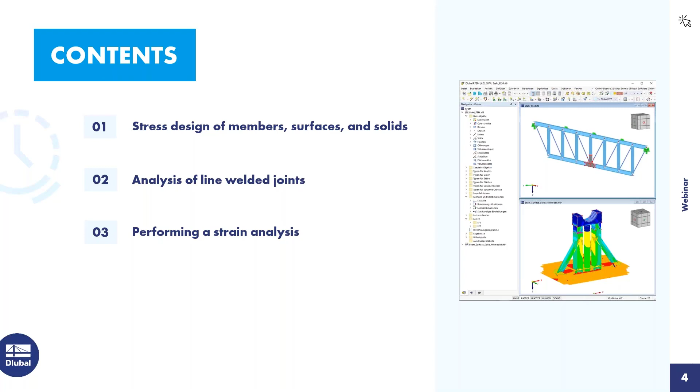I will do this as a live demonstration, so I didn't prepare any additional PowerPoint slides, I will jump directly into the program. Today I also would like to work with predefined files in order to keep the focus on the essential topics.

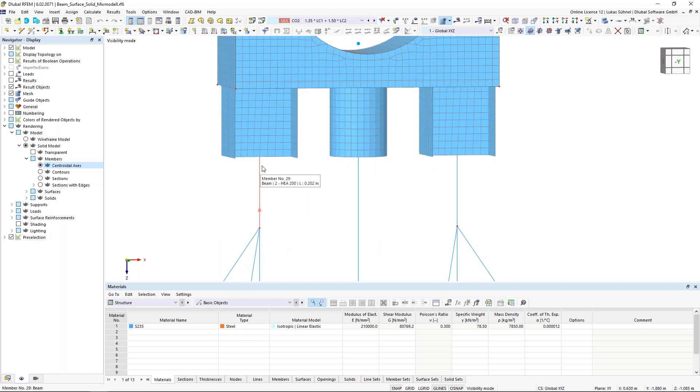What do I have here? I have a mixed structure, mixed in the sense that I have a member structure, surface elements, and also solids. Let me quickly change the rendering so you can easily see the differences. On the bottom, we have this member structure. Then I converted a certain part of my members into a surface structure, as you can see here. It's just the continuation of my members if I display them again. And on top of that, I have my solid model on which I will place some loads.

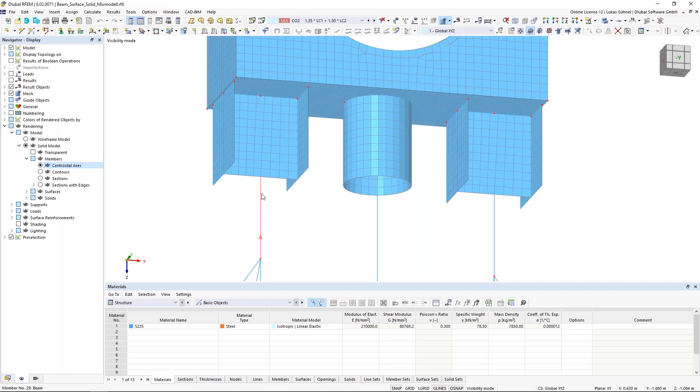Regarding the modeling, which is maybe also interesting to know, in general we can model members, surfaces, and solids in one structure, which is already quite nice. And if you think about the load transfer and the correct transfer of the stiffness, you have to take care of some things when you have a 1D element and 2D elements.

By simply converting these members into surfaces, as I did here, often you don't have a properly or correctly defined connection. You can see it on the left. The surfaces in that area are now basically supported on only one FE node, the FE node where this member connects to the web of this beam. That is, of course, not correct. You would definitely get singularities in that area, and the stiffness transfer is also not correct.

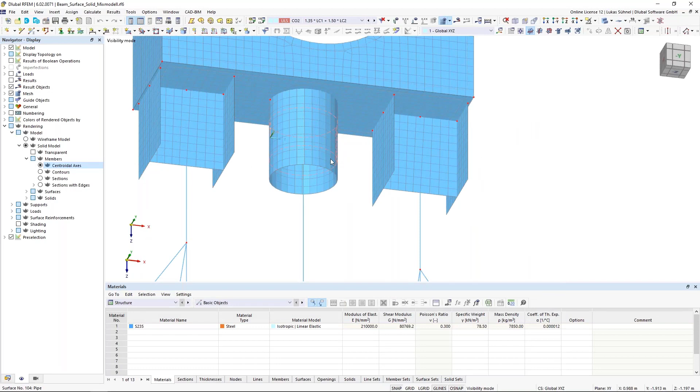Another example can be found in the center. We have here a pipe section, and when you convert a pipe section into a surface, you get the pipe surface. In such a case, you have no connection at all. You can imagine the member is in the center of that circle, and the surface is of course not connected to that member at all. So here we also have to do some modifications in the modeling to have it properly connected.

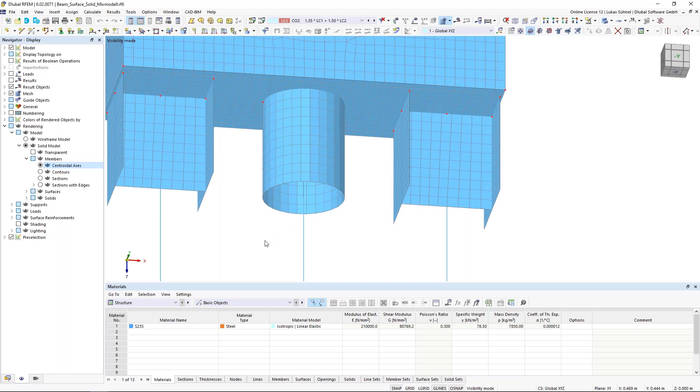And I have it here, I just didn't show it so far. So I will cancel my visibility mode, and the connection can be done in, let's say, 2 ways.

I can use so-called rigid surfaces, and this simply will transfer all my forces and my deformations that I have in this beam, or also vice versa in that surface, via a stiff surface onto the other side. In the center, it's even more crucial, because with this stiff or rigid surface, I'm connecting my member with my surface. Before, I had no connection at all. And again, all deformations and internal forces will be transferred from the beam to the surfaces equally.

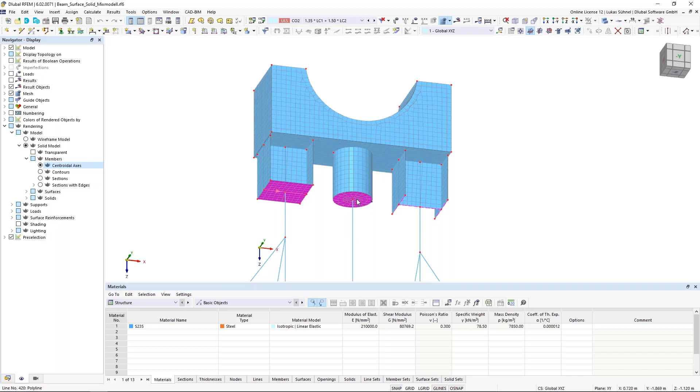An alternative modeling is visible here on the right-hand side. Instead of using a rigid surface, I simply assigned rigid members onto the boundary lines of my surface model. A member with member type rigid works similar to my rigid surface. So this is how you can connect a 1D element with a 2D element. The rigid surface or rigid member may help you here.

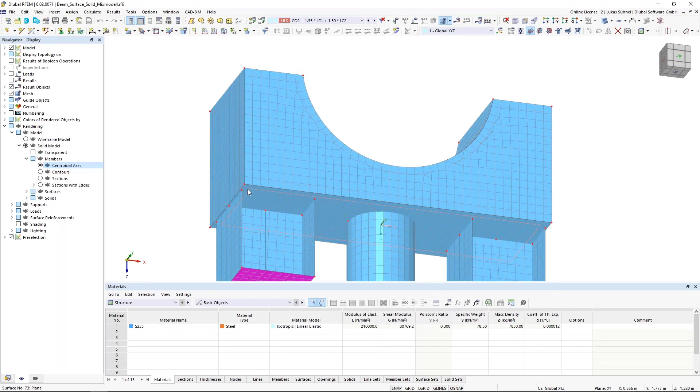Regarding the connection of a surface model with a solid, this is quite easy. The surfaces are defined by the boundary lines - these are those lines here, which are placed inside the boundary surface of that solid. We have a so-called automatic object detection in those surfaces, so the surface detects that there are lines placed inside it, and if that's the case, the FE mesh generator will automatically consider those lines when the mesh is generated. So we have a fixed connection between those lines or surfaces and the solid.

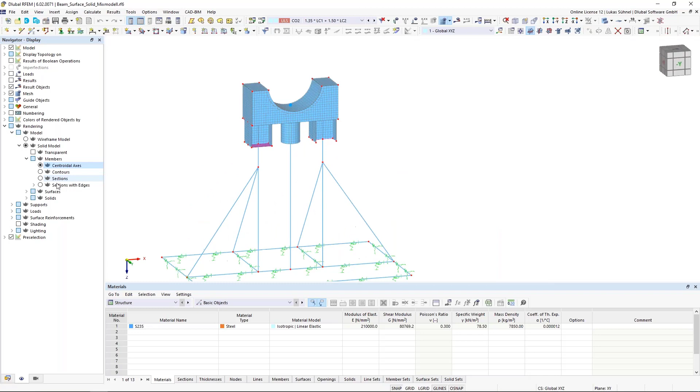So far regarding the modeling. Regarding the loading, these are German names, never mind.

I have 2 load cases: my dead load case here, and then some load in my live load case. That's all I want here in this example. And of course, we have the combination of those load cases using an ultimate limit state design situation and a serviceability limit state design situation.

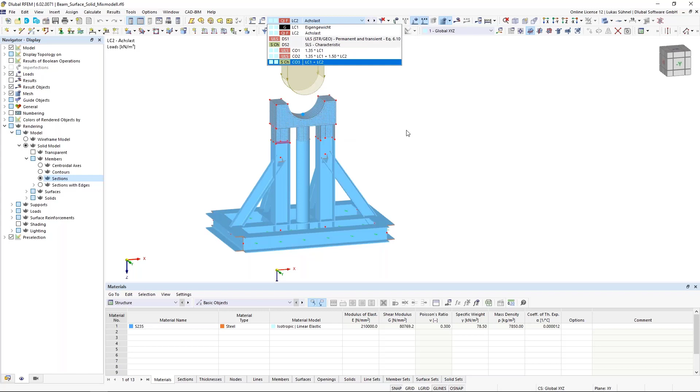Now, if we want to design such a structure, we have 2 main designs that we have to run. We have to run a stress analysis or a cross-section check for our objects, and we have to run a stability design.

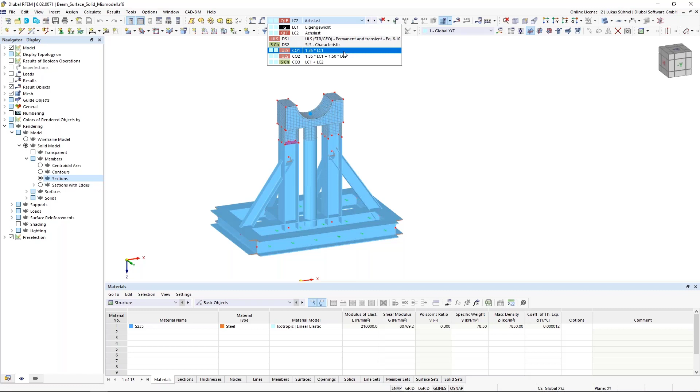Regarding the stability design, I would like to take a look at the results first. So that's what I will do now. I will calculate the important load combination - I have just one here that actually matters, the combination of the dead load and the live load. And let's have a look at the results.

Maybe just on the members for now. I can display the external forces in here, maybe in a different view like that. All right, and what I can see here is I have, of course, compression in my columns, or in my members. So compression is, of course, a sign for buckling.

So if I have compression in members, I have to check buckling. What else do I have? I have some shear forces inside, but they are really small, so shear buckling is most likely not an issue. I have really small torsional moments, I can neglect them. And my bending moments, MY and MZ, are also quite small compared to my cross section or to the dimensions of these beams, so I would say also the bending moments can be neglected.

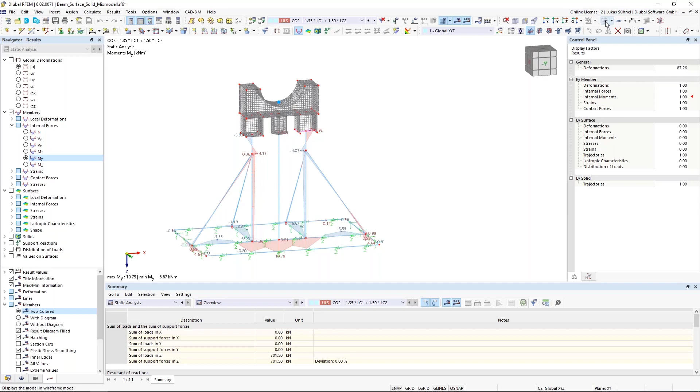What does it mean if I neglect the bending moments? Then lateral torsional buckling is most likely not an issue. And if I check again my structure, I have all these diagonals here connecting to my columns, a pipe section, where lateral torsional buckling is not important at all. So I think it's fair to say lateral torsional buckling is not an issue here.

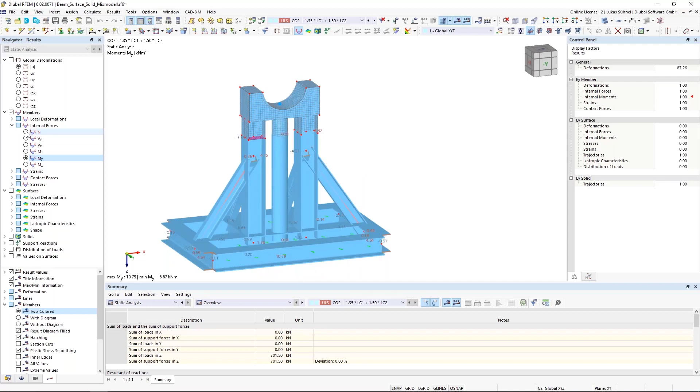What could be an issue is, of course, buckling. But for buckling, I can use some limit checks, or let's say some specific checks, to judge if buckling is actually an issue. And such a check can be found inside the Eurocode 3, in chapter 6.3.1.2, in brackets 4.

The formula basically is you take the axial force in a member and divide it by the critical force of a member. If that is smaller than 0.04, then you don't have to run a buckling check for a member. If we switch it around, and say the critical force of a member divided by the existing force is bigger than 25, then buckling is not an issue. And this is a value we can check via a specific add-on.

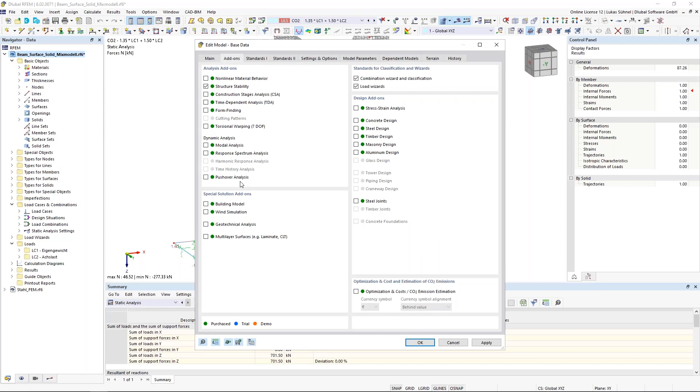I want to do it quickly before I start the stress strain analysis. So if I go into my add-ons, I can activate the structure stability add-on. Now this will calculate this critical load factor, which is the same as I just said, the NCR, the critical force divided by the actual force.

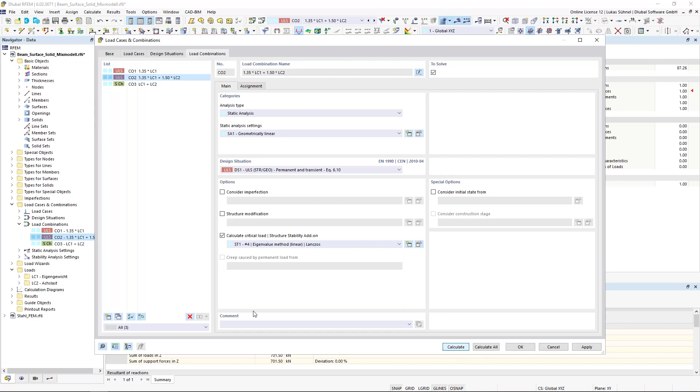I will calculate it in this specific load combination. I can activate now the calculation of the critical load, and I will start the calculation. So this add-on will calculate this critical load factor. It will also calculate buckling lengths and buckling length factors. For me, important is now only the critical load factor, and again, if that is bigger than 25, then buckling is not an issue.

Just a few seconds more. All right, there we are.

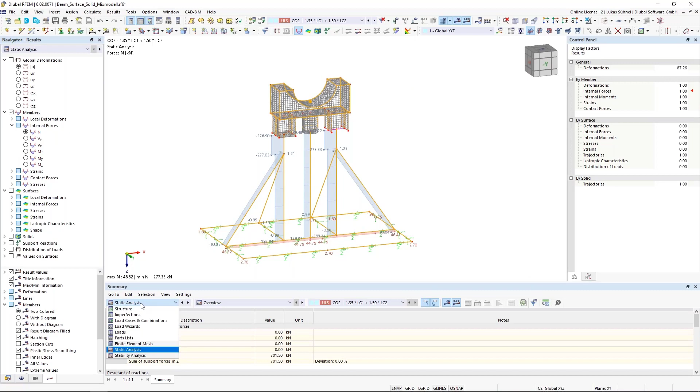So how can I display these results? Well, I can switch in my tables to this stability analysis add-on. And the first value that will be shown here is already the one that I'm interested in. The critical load factor is 29, which is bigger than 25, so I'm good.

And if I want to analyze it even further, I would have to look for an eigenmode that actually deals with the buckling. This could be, for example, the fourth eigenvalue eigenmode. And here we see this would be some kind of buckling for my columns. I have here the factor 34.5, so much bigger than 25. So I can easily say buckling is not an issue.

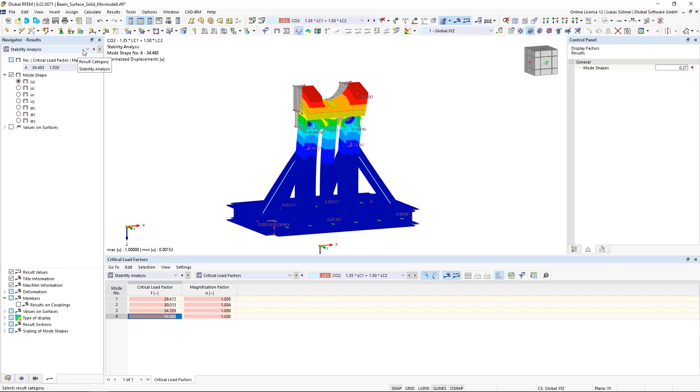Now I excluded buckling and lateral torsional buckling. That means it is enough to simply run a stress analysis for the structure. I can do it in two ways. First of all, I would like to check what result RFEM, the basic RFEM, gives me. So I go back into my static analysis results without using any add-on.

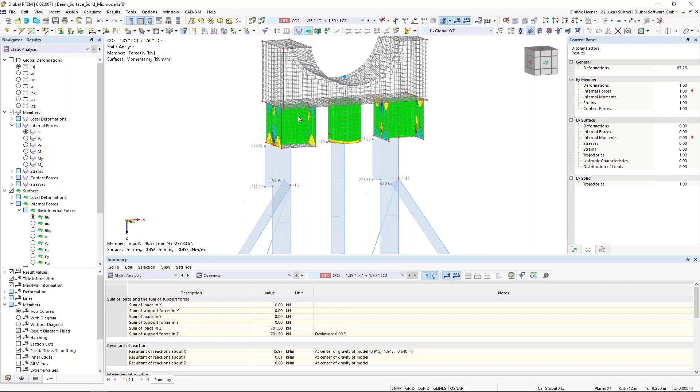And I can see that RFEM calculates the deformations, of course. It calculates the internal forces in members, the internal forces in surfaces and so on. But it also gives me the stresses in members, for example, the equivalent stress according to Mises. It also gives me the stress inside surfaces, and of course, also in my solids.

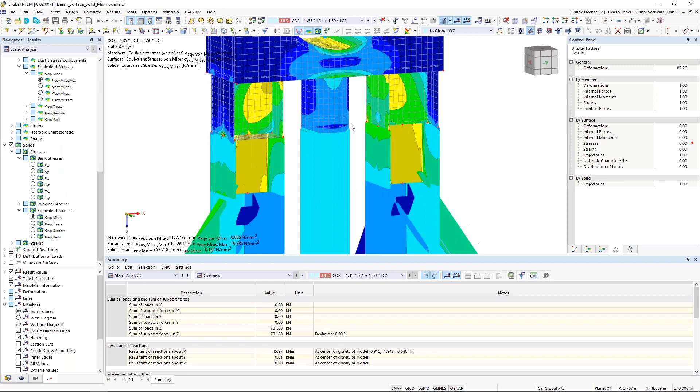So now I'm displaying the stress on all elements. You could use the information in this panel on the right-hand side, or this max-min information on the bottom left of this graphic window, to see that the maximum stress for members, surfaces, and solids is below the yield stress from my steel S235, 235 Newton per square millimeter. We are actually below the limit, so the stress check is fine.

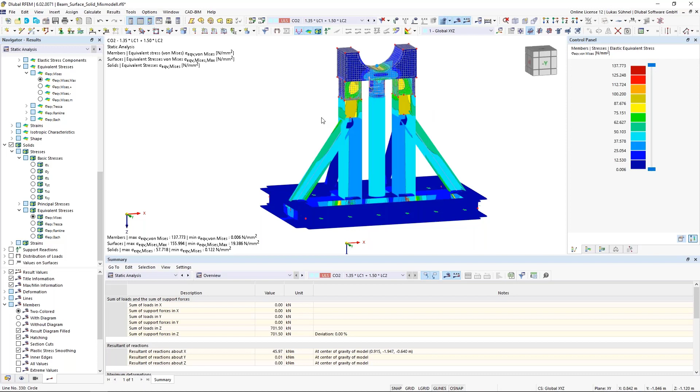Now, if you prefer a design ratio, not just a graphic which shows that stresses are smaller than 235, then you could use the stress strain analysis add-on for that. So let's check this out as well.

I will activate the add-on in my add-ons tab, as I did before with the structure stability. The stress strain analysis add-on can be found on the right-hand side under the design add-ons. Usually we have to deal with the standards—if we run a steel design or a concrete design, then the standard is important. The stress strain analysis add-on is standard independent, so we don't care in that case.

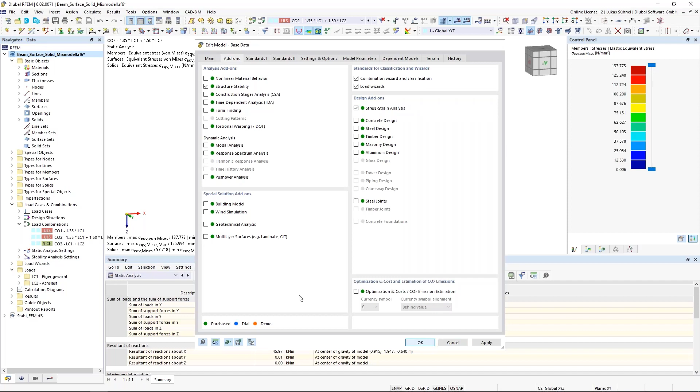Now, when you activate an add-on, you get a new entry in the tables, and this is how I personally usually deal with the add-ons. I go into my table on the bottom and click through these subtables. Let's do it for this example, just using a different display. I'm here in the input data, in the first subtable, design situations, and here I can decide which design situation should be analyzed. Of course, it makes only sense to analyze the ultimate limit state and not the serviceability limit state design situation, so I deactivate the second one.

In the next table, you can select which objects you want to analyze. Here, all objects are selected. Of course, you could select the surfaces or the members that you want to analyze if it's not all of them. In my case, I will simply analyze all.

There's another table which looks quite similar, but this is called objects to analyze stress ranges. So if you want to run a fatigue design afterwards, you need the stress range - the difference between the maximum and the minimum stress at a certain location. You can also select those objects where you need the stress range for. In my case, let's say I need the stress range in my solids, so I'm selecting the solids.

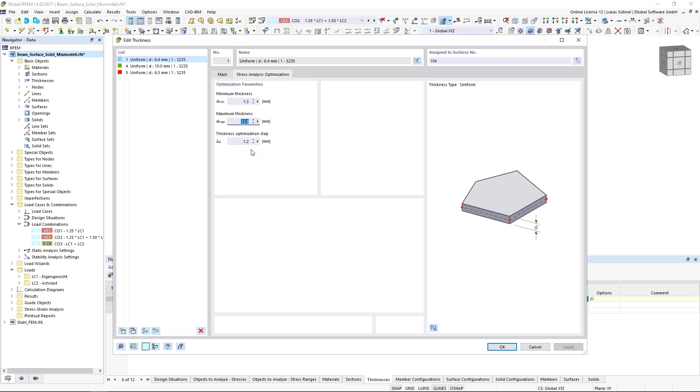So let's say you have a specific surface and you are not sure which thickness is appropriate. You can right click and activate here also the optimize functionality. Then you get an additional window, and here you can define the minimum thickness, maximum thickness, and the step. Then it will look for the best thickness. I will not use this now, just as an information.

Now we have 3 additional subtables here, configurations. In those configurations, you can define which stress do you want to analyze. You could, of course, select all of them, but usually that's not what you care of. Usually you care only of, let's say, maybe the equivalent stress according to Mises, maybe the total shear stress, maybe the total normal stress. This is maybe what you're interested in.

So with the click in this table, you select which stresses you want to calculate, and with the center column, you can also define the limit stress. You can see here the limit normal stress, limit shear stress, and limit equivalent stress is selected.

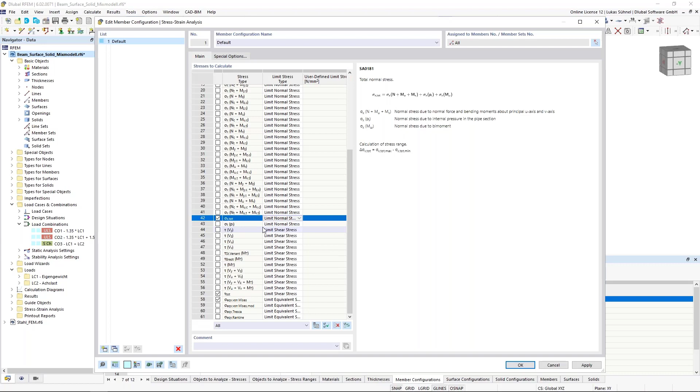So we try to do it automatically for certain materials. For some materials we can't. In that case, you can select here user defined, and then you can enter a value in the last column. In my case, I'm using the limit normal stress.

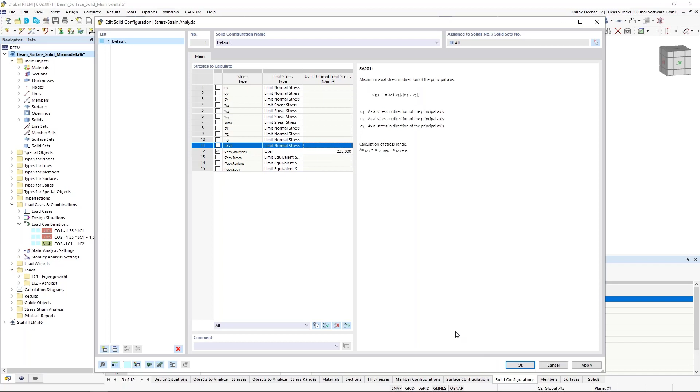For the surfaces, the same configuration basically - let's select only those two. And also for the solids, we have a configuration. Again, I'm only interested here in the equivalent stress according to Mises. And just to show it, we can enter here a manual value, maybe 235 Newton per square millimeter for my material, which is an S235. So that makes sense.

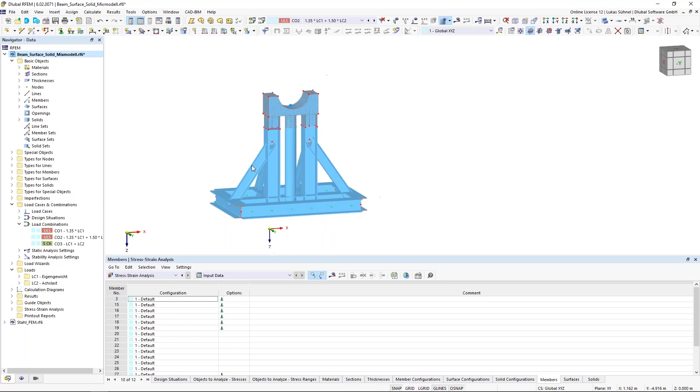In the last tables, you can assign the different configurations that you may have to your members, but you can also do it graphically. So let's say you have multiple configurations for your members, you can edit the members and simply assign the configuration in that window to them. So the handling, I'd say, is quite easy. We already finished with the input, so we can run the analysis.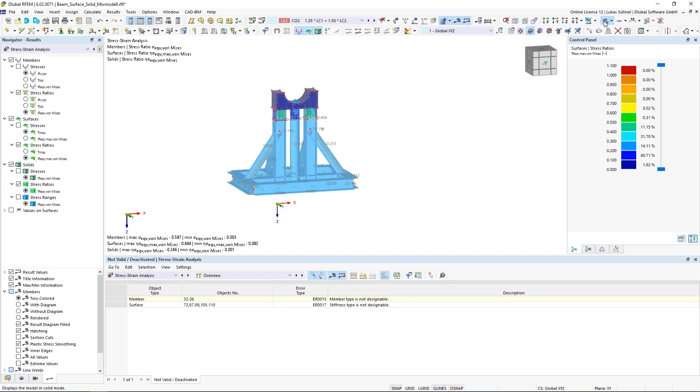So after the analysis, we get results graphically and also in the tables. Let's start with the tables first.

If there are design checks which are not fulfilled, or you have selected objects that can't be designed, then you get an overview table. If everything is okay, you won't see this overview table.

Just in case something is not correct or you get a warning, it will show up as shown here. We can see that for some members and some stiffnesses or surfaces, basically, the design is not possible. That's nothing which should bother us.

At the beginning, we said please design or analyze all members. All members also included the rigid members. That makes no sense, basically. We have no section for them. We have no material assigned to them.

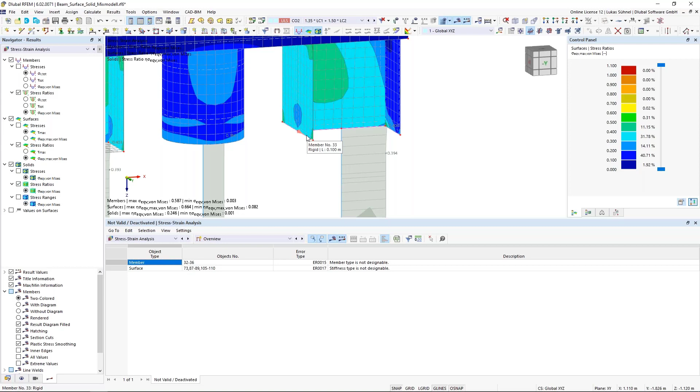We can't analyze them in this add-on. That's what this add-on just tells us here. They are not designable. And the same, of course, for the rigid surfaces. So nothing we have to worry about in that case.

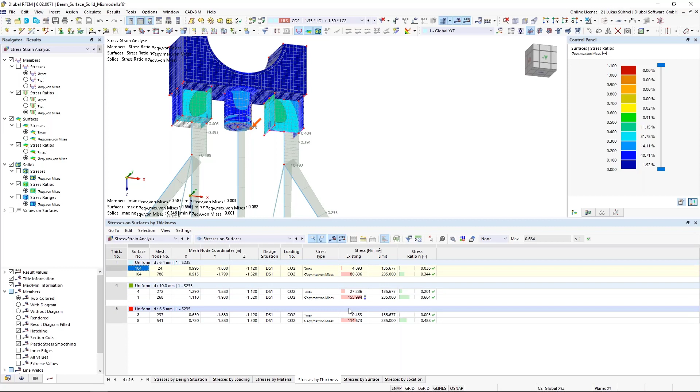If you want to see the details of the results, we can go into the stresses on members tables, or stresses on surfaces and stresses on solids. This is the stress or table output, with different filters by design situation, or for each surface the maximum stress, or for the various thicknesses that we have assigned here.

We can also display these results graphically. On the left, you can see we have here an updated result navigator for the stress strain analysis results, where we can select the stresses in our members, on the surfaces, and so on. I think this is quite clear how to handle that.

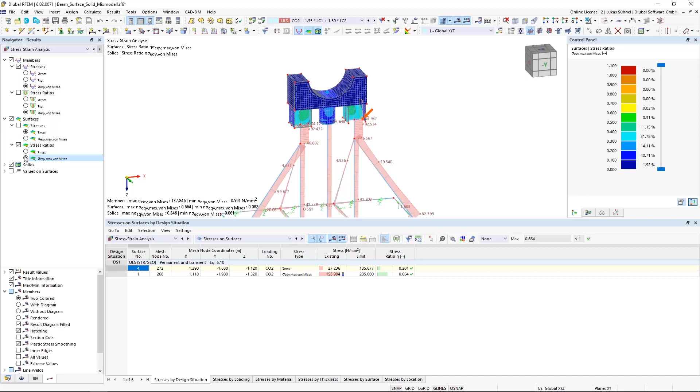The last information here: we also selected the solids for a stress range analysis. Again, those results can be found in the tables. This table looks a bit different, as you can see. You can see the minimum stress, the maximum stress, the range, basically the difference. And you can also see which combination or combinations are linked to this stress range.

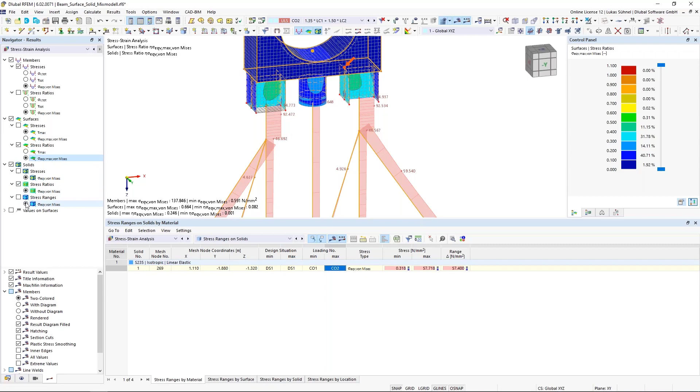All right, again we could display this graphically. So far regarding this basic functionality, the stress analysis on members, surfaces, and solids.

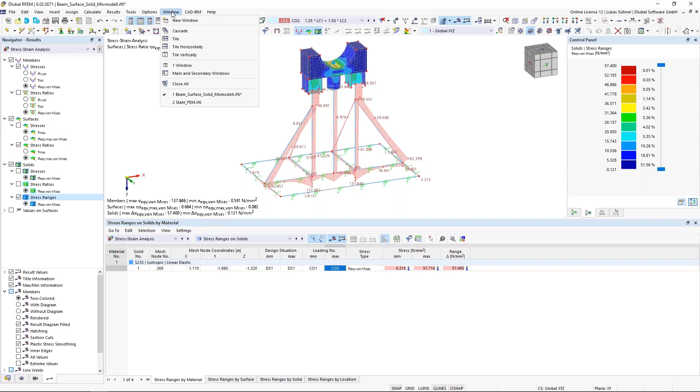And now I would like to switch to my second chapter, where I would like to show you the stress analysis of a line welded joint. For that, I have a different structure. Let me quickly explain it.

It's a 2D truss member. Basically, the tension forces will be taken over by these round bars, the compression by these HEA sections. And one particular detail joint I wanted to analyze using surfaces, basically.

You can see the rest of the structure is again a beam structure, a 1D element structure, and this specific detail I want to analyze in detail using surfaces.

I modeled the connection plates here. These tension members are connected to this bolt, and this bolt transfers the forces onto my connection plate.

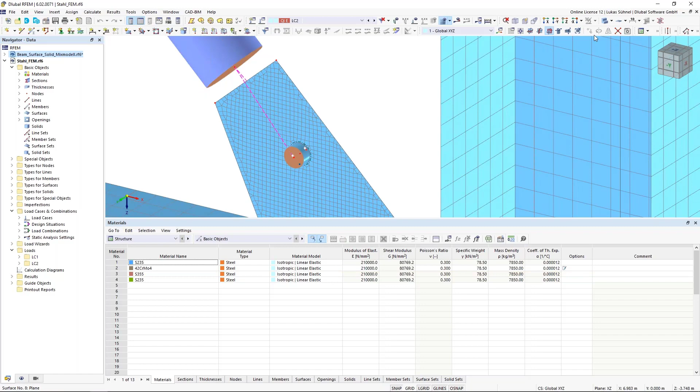The force transfer, for those who haven't seen that before, can be done like this. Usually you create an opening inside that surface, of course, where the bolt goes through. But if you have a bolt in the center as a member element, it's not connected to the surface. So somehow you have to establish this connection between, let's say, this node and this connection plate.

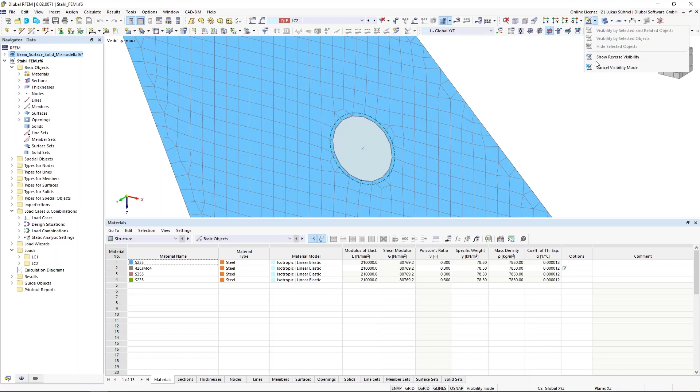This can be done using a specific surface. So I filled that hole again with a surface, and that surface has a stiffness type without membrane tension. This specific type simply acts only under compression.

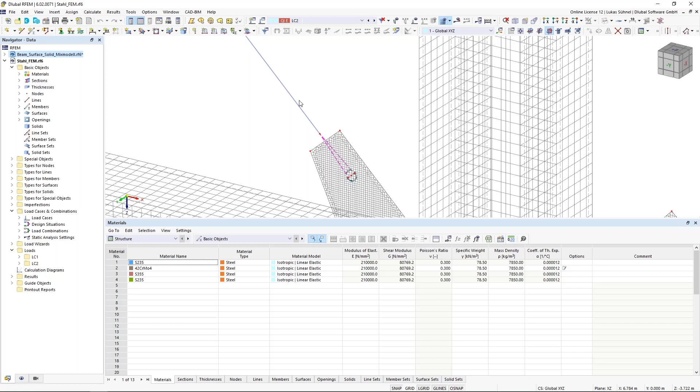So you can imagine if we have tension forces in that tension member, the bolt will move to the top left now, upwards, and we will get compression in that area. We will get tension on the back side of this plate, but since this surface will fail under tension, we only have forces on the left-hand side. This is a good feature to consider this connection between the bolt and the hole.

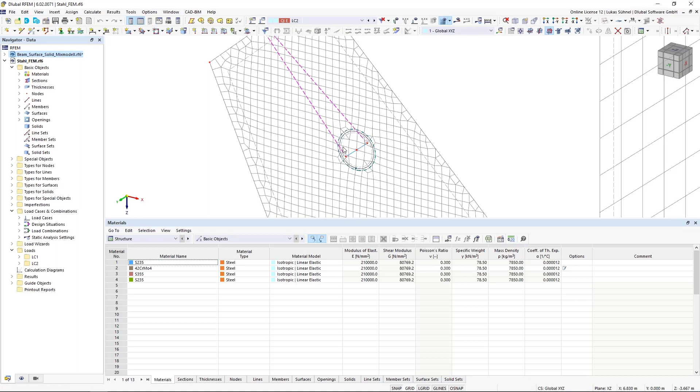All right. So far regarding the modeling, I have, of course, my steel connection plate here, and the steel connection plate should be welded to my top flange of this I-section.

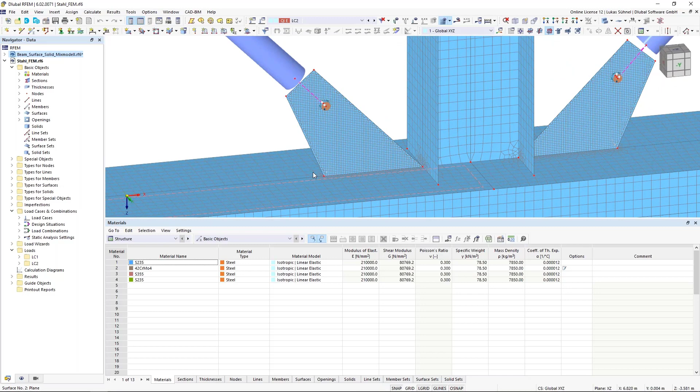Now, if I want to design such a weld, I can use this new object which we have in RFEM 6. It's called line welded joints. You can find it under types for lines.

And you can define a new type in here. Let's say this weld that I want to design is a T-joint, a single fillet weld, continuous arrangement, and the weld size is 4 millimeters.

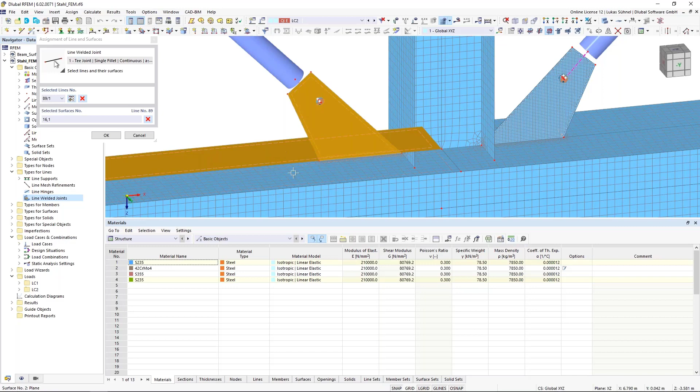So far, so good. Now I can assign this type to my lines, and the weld should be placed here, of course. It's not enough to just connect the line—we also have to select the surfaces that are participating, basically, the steel connection plate and the upper flange of my beam.

Okay, that's how we can define such a line welded joint. We will show it as a dotted line on each of the participating surfaces.

And if you want to design such a weld, you need the stress strain analysis add-on. Basic RFEM 6 won't give you any results for that line welded joint, so it's required to have the stress strain analysis add-on. That's why I'm activating it again.

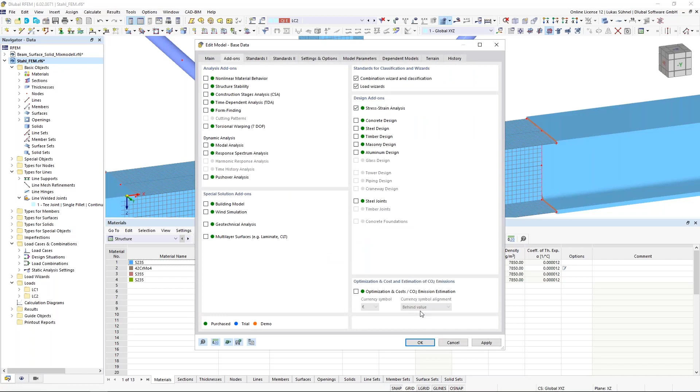Now let's go quickly through the input of this add-on. I'm starting again with the design situations. Yeah, I think that is clear.

Objects to analyze: in that case, I don't care about the stresses in my members. I want to select just some of the surfaces that I want to analyze, not all of them. And of course, I want to analyze my line welded joint.

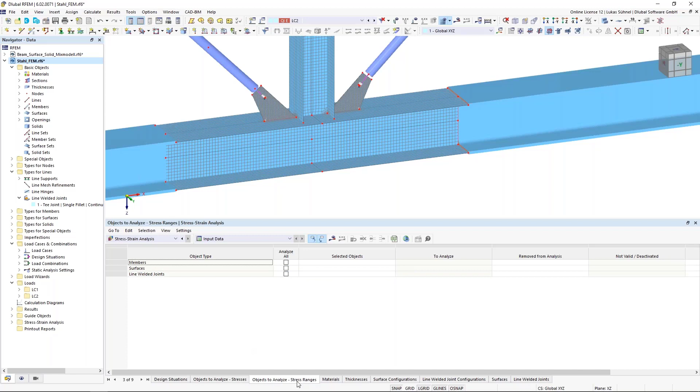Stress ranges, I don't care about in that case here. I will continue with the surface configuration. Again, I will select just some of the stresses—I'm not interested in all of them. Maximum shear stress, maximum stress according to Mises, is quite interesting for me.

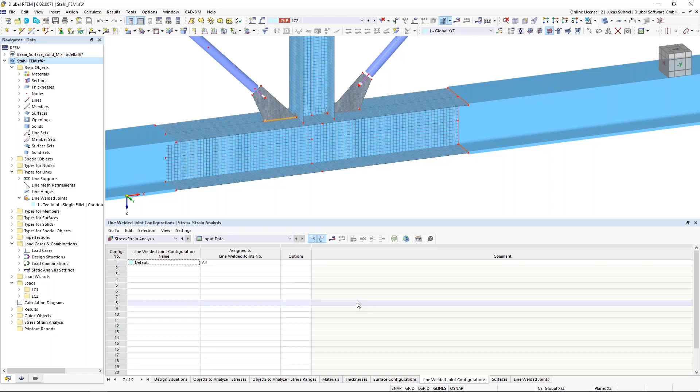And now we have also a new configuration for my line welded joint. So each specific object has its own configuration: surfaces, members, solids, line welded joints.

And in here, it looks basically the same. I can select which stresses I want to calculate. Even though you select maybe all of them, not all of them will be shown.

It depends. For my fillet weld, which I have here, I have two different methods: the simplified method and the directional method, for example. Let's say we are using the simplified method. For that method, I only need the following stresses—those four, and the resulting weld stress. If I select the others as well, they won't show up in my result table since they are not part of this simplified design method. So that's why I select just those four, those five.

Same logic as before: when we select the stress, it means we tell the add-on, please calculate the stress for this specific stress type.

By default, we do not get the limit stresses for the welds. You can see it here, it's selected none. Why is that the case? Well, we are standard independent in that add-on. The limit stress for welds is, however, usually standard dependent.

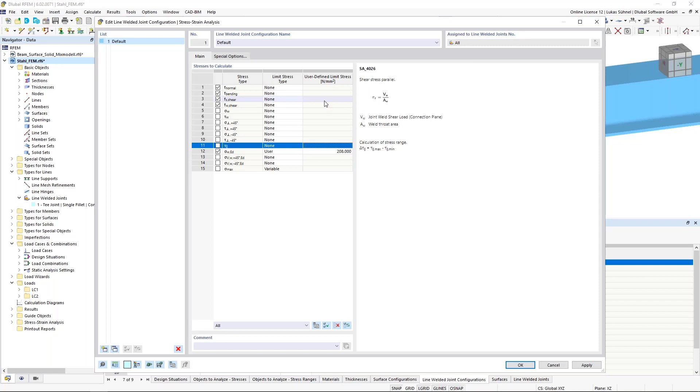Let's say we assume a Eurocode design, then the limit stress for this simplified method would be for an S235: FU divided by square root 3, multiplied by beta W, multiplied by gamma M2, which is 208 Newton per square millimeter. I could also enter this limit stress for the other types, but it doesn't matter—I only need it for the resulting stress.

All right, so far, so good. I defined all necessary inputs, and now I can run my stress strain analysis again.

Okay, I get the overview table. It shows me some exceeding stress for my surfaces. I will take care of that later on.

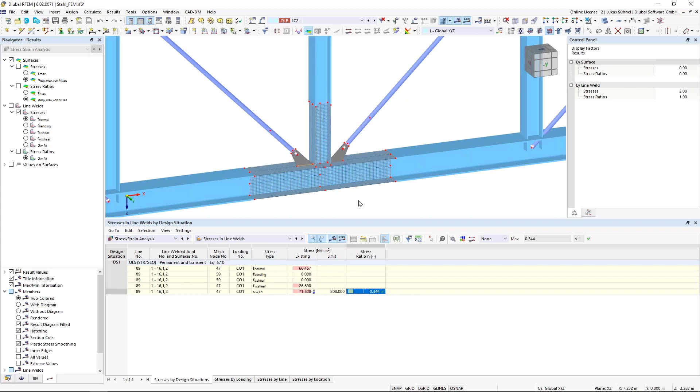Now I'm interested in the line welded stresses, and we can see here we have an existing stress of 71 Newton per square millimeter, which is smaller than the limit. So we get the design ratio, and the weld has been checked.

We can also display the results graphically as usually. Let me show it quickly. We get the diagrams also shown here. Maybe it's better to select a specific visibility for them: the different stresses, normal stress, shear stress, also resulting stress, and of course also a stress ratio, and that's it.

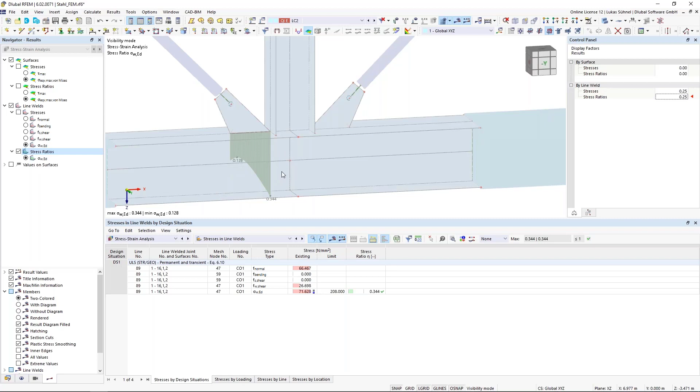You can of course print these graphics into your protocol as you are used to in Dlubal. The tables will end up in the protocol, so I think the handling, the post-processing is clear.

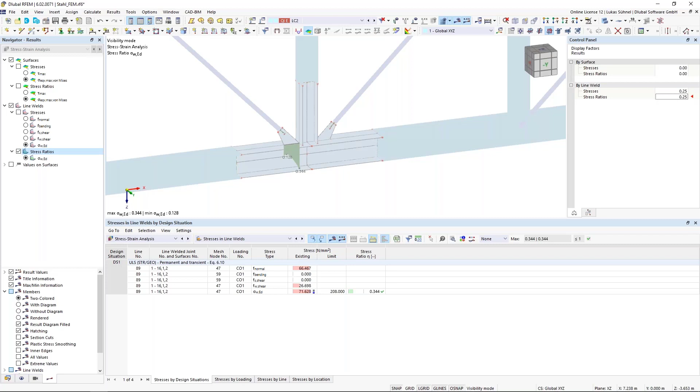So far regarding the line welded stress or line welds. Let's analyze this exceeding stress in the surfaces. Let's display everything again. Maybe let's turn off the FE mesh for a second. And of course, we need the stresses in the surfaces.

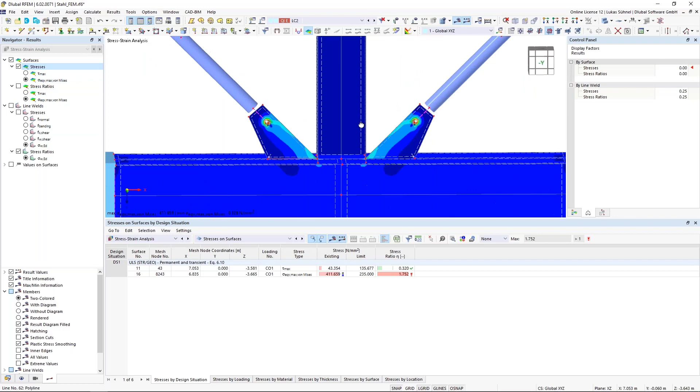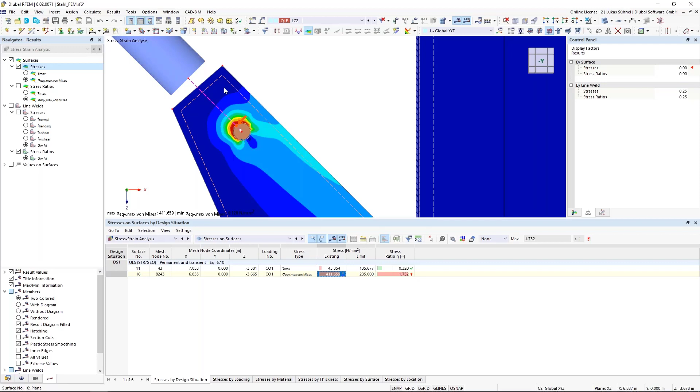What we can see here in the table already is that we have an existing stress of more than 400 Newton per square millimeter, which is of course exceeding the limit stress. And we can also see by clicking on this table, this nice arrow, which shows us where the issue is. And the issue is where we have the bolts connecting to the connecting plates.

I think it's quite clear that such a stress cannot show up in reality, simply because the S235 will yield when it reaches the limit stress. It can't get these kind of stresses. The steel will yield, it will deform. So we get these high stresses because we use a simplified material model for our steel. The default is usually an isotropic linear elastic material model, which means we can get stresses like infinite stresses.

Since this is not exactly correct, we could in theory use a different material model. The default material models are, however, only isotropic linear elastic models or orthotropic linear elastic models. Plastic is not supported as a default setting. If you are looking for more advanced material models, you would need the nonlinear material behavior add-on. I can select it here.

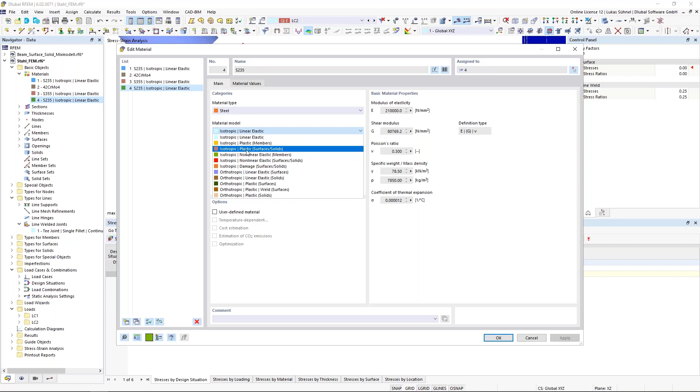Now you can see if I edit my material again, I have much more material models. For example, the isotropic plastic material model for surfaces and solids. That's the one I select. And these are the parameters for this material model.

I can select the basic or bilinear stress strain diagram. I stick to the basic diagram type. That should be enough for my case here. I could select the stress failure hypothesis. This is fine for me. And that's all I need to define.

If I assign this material model to my material, it means it will yield as soon as it reaches the yield strength of about 235 Newton per square millimeter.

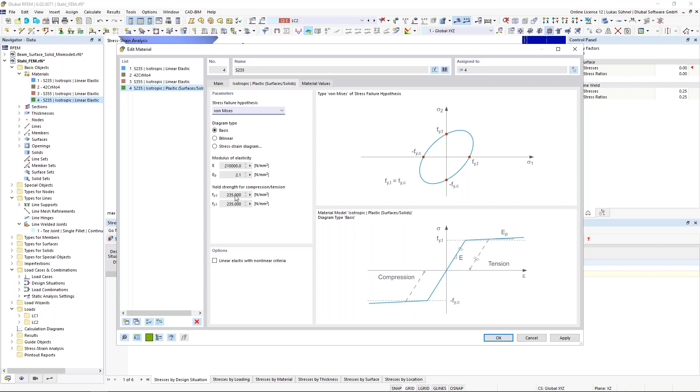How do we do this in the calculation? For that, I would like to show the FE mesh again. How do we consider this yielding? Well, you saw before that we had some stress peaks in that area here. The stress in those FE elements was higher than the limit stress.

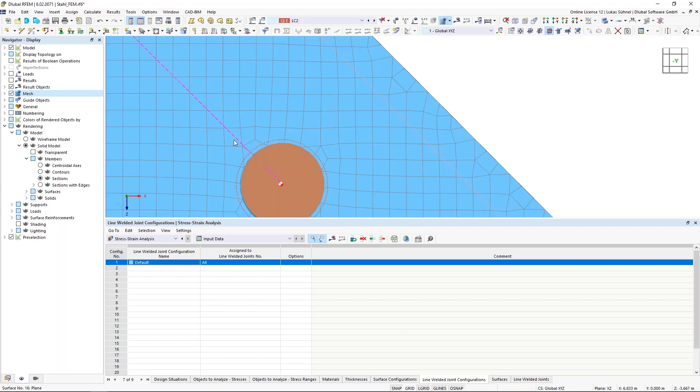If that is the case, with the plastic material model, we will reduce the stiffness of an FE element. So we take a look at each FE element and we reduce the stiffness of those FE elements where the stress is exceeding the limit stress. If we reduce the stiffness, it means they will deform much more than the other elements, which with the regular stiffness will take over more of those forces until they maybe also reach the limit stress. Then we will reduce the stiffness again, and so on.

That's the logic that we're using here. So we take a look at each FE element, and since we do it on this FE element basis, we should also check the results on FE elements.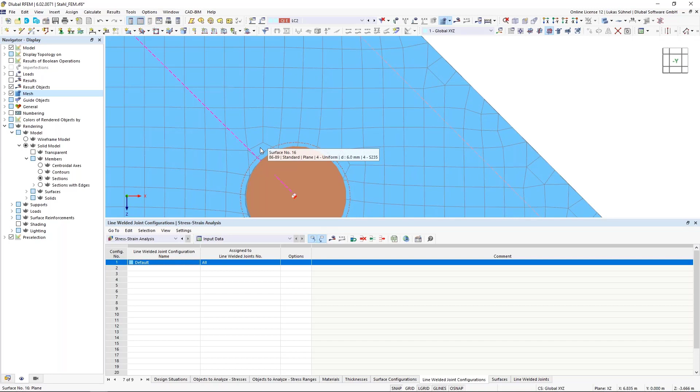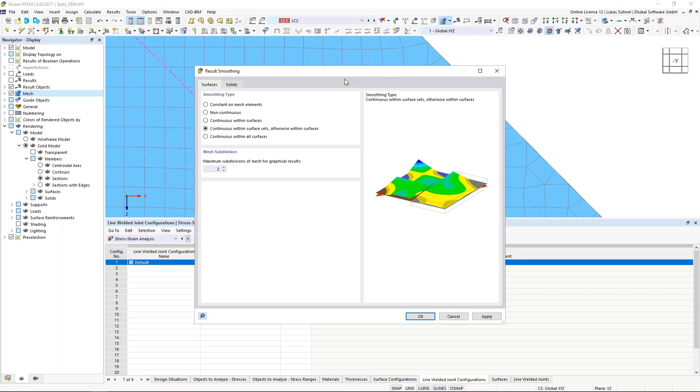What does it mean? I can go to my calculate menu under the result smoothing function and select here constant on mesh elements. The default, I think, is this one, continuous within surface sets or otherwise within surfaces. So we get a lot of results for FE meshes, or for each FE node we get a result, and usually we use some functionality to smooth those results so that they look nice.

In this particular case, when we have this FE mesh specific look on the results, we should also smooth it constant on FE mesh elements. So we get this pixel-like look afterwards.

This setting under calculate result smoothing is for the results of RFEM 6 itself. We have the same setting in our stress strain analysis add-on. So if I go on the bottom left, stress strain analysis settings, I can also select it for this add-on, which I'm doing here.

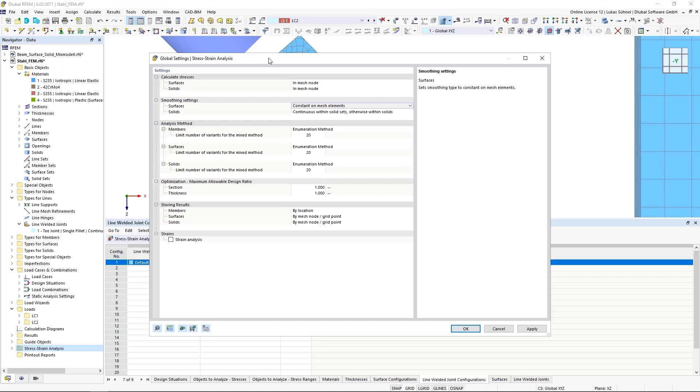Now I can recalculate the results, and small spoiler, we won't get any stresses higher than 235 Newton per square millimeter due to this material model. So the stress check is fine. It's not a big issue anymore, but that's not the end of the check.

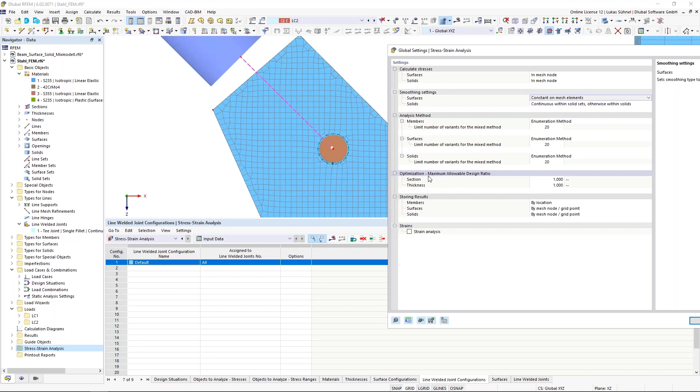We will get higher deformations. We get these plastic strains probably in our structure, and that's usually what you look at when you use the plastic material model. You check the strains because the stresses are not relevant anymore. And we can run also a strain analysis inside the stress strain analysis add-on.

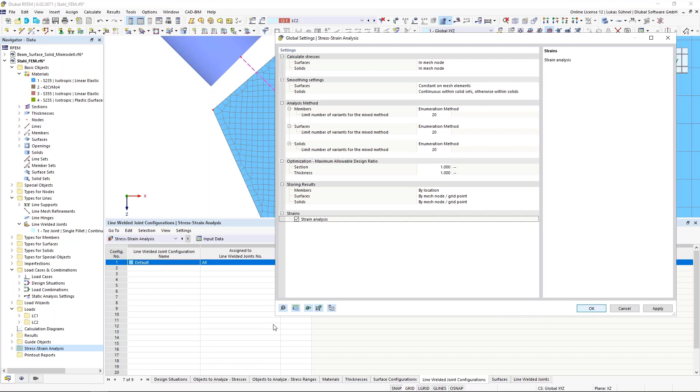That's basically what the module name is, stress strain analysis. We can activate the strain analysis also in these global settings, where I change the smoothing settings. I click on OK, and if I activate that analysis, I can go back into my surface configuration. And now I have this additional tab here.

It shows me now strains, and I can select for which strain I want, or which strain it should calculate. Let's say the Mises strain. And we also have a limit defined for that. We have a plastic limit strain of 5%. That's what we defined here. You can change it, of course, by simply clicking into it and defining a different value.

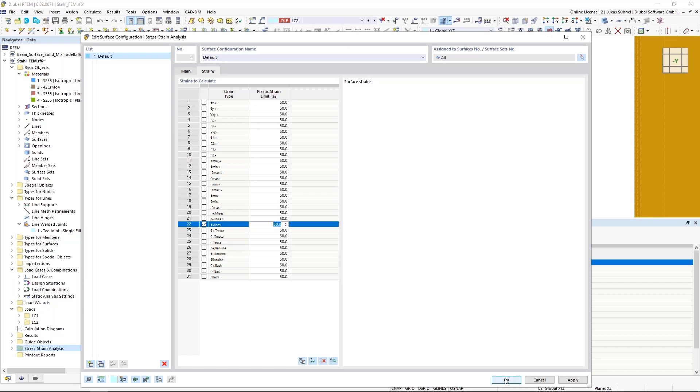That's what we're defining here as a limit. Of course, you could say your limit is when the strain is so big that the bolt moved completely through your connection plate, so that the structure is unstable during the calculation. I'm not sure if that's the right limit. We defined here the 5%, but at the end, it's up to you.

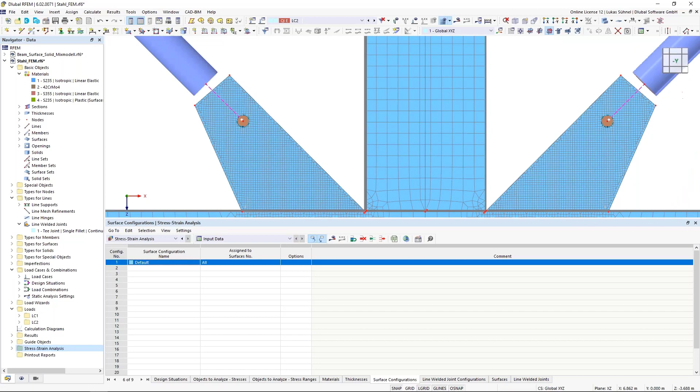All right, that's all that I have to define here. Now I can run the stress strain analysis again. It will take a bit longer because now it's a nonlinear analysis. Each FE element is nonlinear, so we will need more iterations until we get an equilibrium, but still quite fast in that example.

Let's have a look at the results. I get the overview table where it says stress ratio is 1. If I check the details, it's just slightly above the limit. So it's just a numerical issue, let's say, not a big deal.

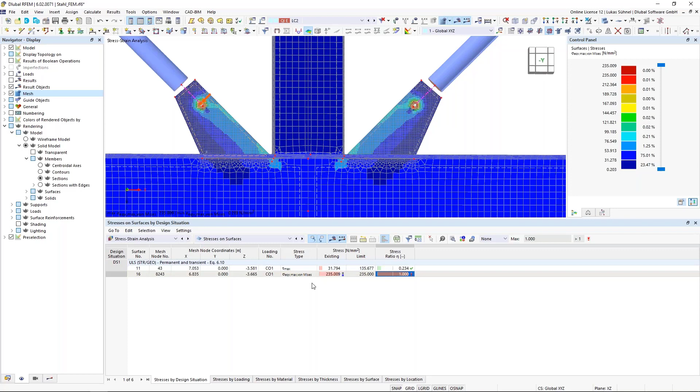We can neglect this. The stresses are, of course, fine, as you can see here. We have here 235 Newton per square millimeter maximum. We also have this pixel-like display of results. That's the result smoothing that I changed.

And of course, we can now also check the strains. As I said, this is now important. So instead of checking the stresses on surfaces, I can check my strains on surfaces. And this table looks also similar. We have an existing strain, 6.2 per mil.

That's, however, the total strain. The plastic strain is just 4.4 per mil. And this plastic strain will be compared to the limit of 50 per mil, which results in this plastic strain ratio. So this is the strain design, basically.

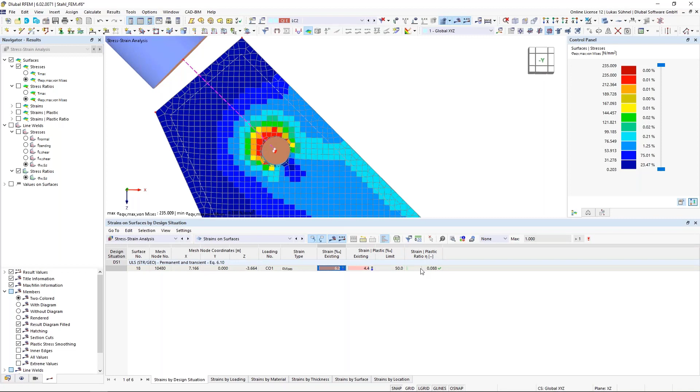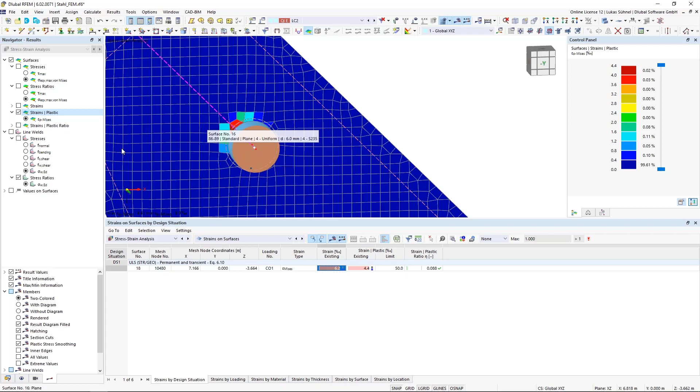This is how you can do it with the add-on stress strain analysis, and that is also what I would like to show you here. Maybe what I forgot now, we have, of course, also the strains as a result graphically, the total strain, but also the plastic strain, which is always smaller. And again, also the plastic strain ratio. Well, not much to see here, but the plastic strain.